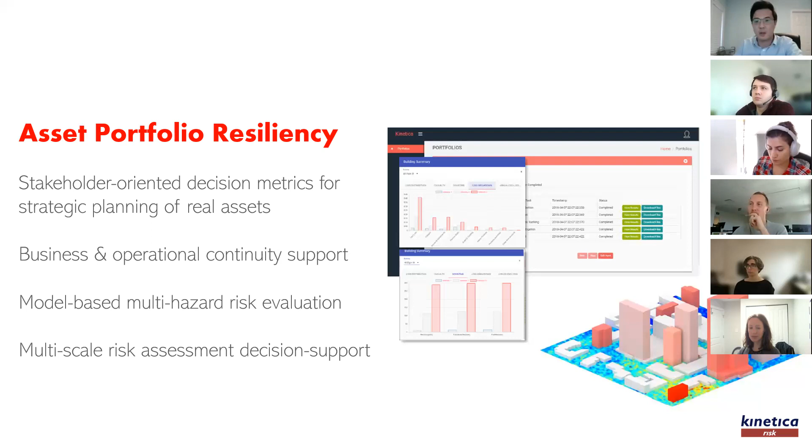So enough about that, I think it's time to bring it back to the topic. Why should we be discussing resiliency and sustainability together? That's not really a rhetorical question, but a genuine one, because a lot of my practice, honestly, my feeling is that both of these aspects are sort of in their own silo. They're well encapsulated in their own practice group. But I do encounter cases where a lot of the times you should be considering both of them.

And when I say sustainability, in the context of this presentation, 90% of the time I mean embodied carbon. I realize sustainability is a much bigger umbrella covering a lot more aspects than just carbon emissions, but perhaps it's somewhat intentional, in the sense that I wanted to convey there's probably more to it than just the embodied carbon. But the embodied carbon aspect is one big one, and that's our focus today.

So I wanted to start this discussion with a thought starter. If you contrast the qualities of sustainable construction versus resilient construction, what do you tend to think about? On one hand, for sustainable construction, we are typically interested in lower operational carbon, lower embodied carbon, lower energy, recycling buildings, reusing them, extending their life at the end of life.

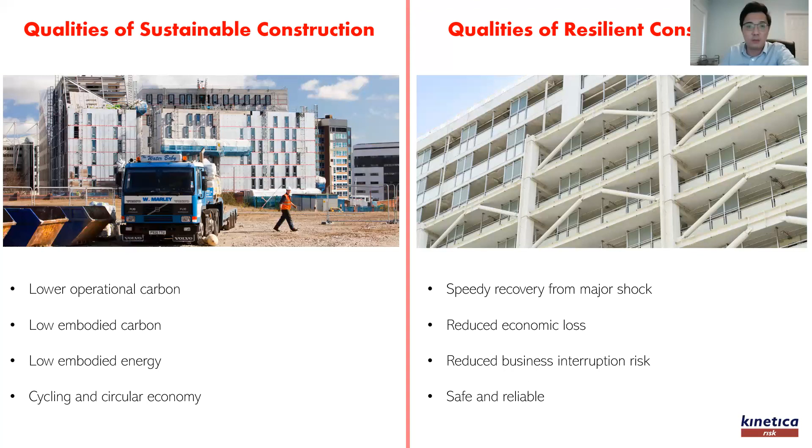If you look at these pointers and try to align them, you'll find that, maybe not in all cases, but in some cases, it's questionable whether they are consistent. For example, you can ask whether recycling buildings at the end of their useful life, albeit a very sensible thing to do from a sustainability perspective, is actually resilient. On the other hand, if using low embodied carbon materials such as timber in robust structures that resist very extreme environmental loads, is that feasible?

You could probably convince yourself that not in all cases these are conflicting or mutually exclusive things, but at least in some cases these are competing interests. So just keep that in mind.

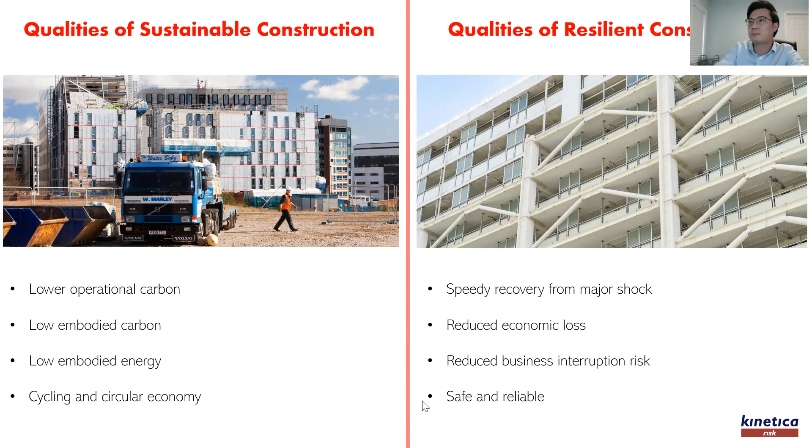Again, it's the same exercise, but coming more from a decision maker's perspective: what are the drivers that make people decide on sustainable construction practice versus resilient construction practice? On one hand, we hear a lot these days about ESG and corporate responsibility being one driving factor for going sustainable and going low carbon.

TCFD reporting and perhaps upcoming regulatory requirements will also tie into accessibility of capital for a lot of developers. There's also market forces; investors and buyers would like to have low carbon development. These are all forces driving people towards sustainable design.

On the other hand, for resilience, a lot of the time this is driven by protecting human well-being, health, and safety. I hate to say this, but a lot of the time this comes in the form of code compliance. For a lot of forward-looking business owners, it's about protecting critical assets, content, business continuity, and reputation.

There's also a market demand for disaster-resilient assets. I hate to say that this is probably less mature in Canada compared to some of the more disaster-prone regions in the world, such as Japan, Chile, Taiwan, and the Philippines. In those regions, you can actually see resiliency or disaster resiliency used as a marketing tool by developers, it's that developed in those economies.

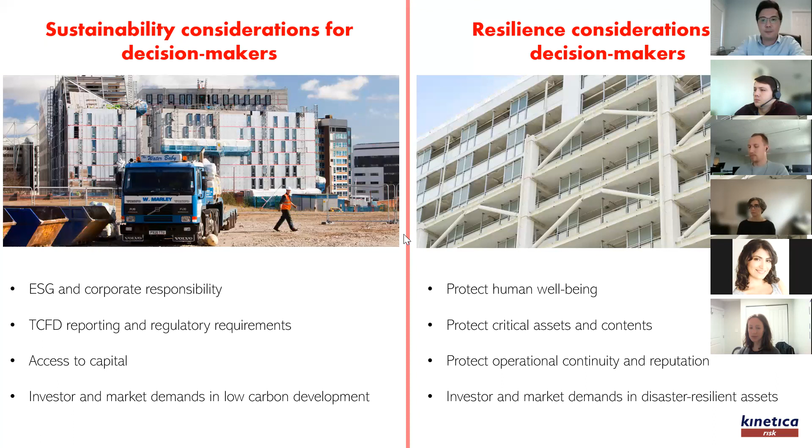The reason why I have these long contextual setting slides is that before I even get into embodied carbon, I want to highlight that there is a greater underlying theme: there should be a more holistic decision-making framework that incorporates both of these aspects when dealing with our built environment. A lot of times we'll find competing interests, meaning we'll have to balance trade-offs, and that's just the reality of things. If we don't do that, the alternative is that we may achieve neither.

Focusing back on the topic at hand, embodied carbon, I wanted to start with the phrase we hear very often: the greenest building is the one that's already built, or that already exists. Of course, you can ask, is that true? To be fair, I think in a lot of cases this is actually true, but I can contemplate some examples where this isn't true. As a society, we obviously want to reuse our buildings, but doing so blindly may leave some physical vulnerabilities unattended, leading not only to poorer building performance in terms of safety, but also defeating the purpose of reusing the building in the first place. We must be careful about that.

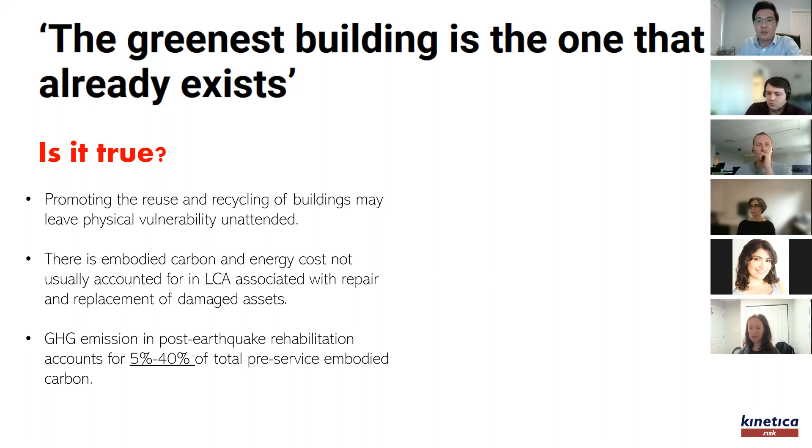But keep in mind that when a major event does occur and you get collapsed buildings, the embodied carbon to replace a building is pretty much 100% of the pre-service carbon, plus additional costs for demolition and debris removal and so on.

This is an example that's used often: the Christchurch earthquake in 2011, a little bit over a decade ago. This is a picture of the downtown area shown after the Christchurch earthquake. I think this is taken 5 years after the initial event, where most of the building was demolished. So 70% of the CBD has actually been demolished because of the earthquake, not because buildings collapsed, but because it was deemed impractical to actually repair them.

So demolition from the event led to basically 100% embodied carbon costs, if you think of it from the perspective of the building being replaced. There's a lot more I can talk about Christchurch, but the point here is that when an earthquake happens, it incurs a tremendous carbon cost to society. And it's so big that perhaps a substantial amount of our effort in trying to curb and reduce carbon emissions elsewhere will be undone. That's something to be thinking about.

Another example that always comes up in this topic is the tsunami and earthquake sequence in Tohoku, again in 2011, which was not a great year for disaster resilience. Most of you have probably seen online videos of the tsunami wiping out everything in its way as it makes shore. The fact is that the post-tsunami reconstruction of the residential sector alone in 2011 emitted about 26.3 million tons of CO2. To put that in perspective, that's about 2.1% of the total national emission in Japan.

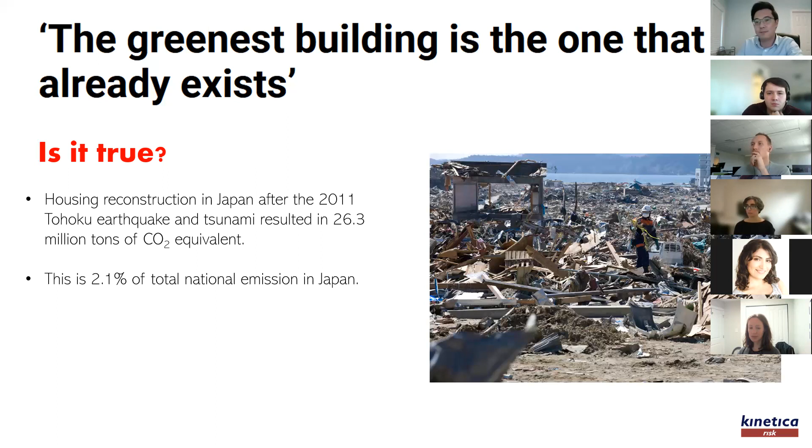So the previous couple of slides consider only earthquakes. In fact, talking climate change these days, extreme weather events such as hurricanes, floods, wildfire, which is something that's not unfamiliar in BC, can add further contributions to this carbon cost.

So flood and extreme events like this are relatively less severe. I mean, this one caused, I think, probably insured damage of $12 billion plus or minus, comparing to, you're probably looking at $200 billion US dollars for the Tohoku earthquake and tsunami.

But still, they are more frequent, like hurricanes happen every year. They're more frequent, and therefore the bill, as far as embodied carbon is concerned, may actually be even bigger coming from climate hazards because they may be getting more frequent as climate change makes its course.

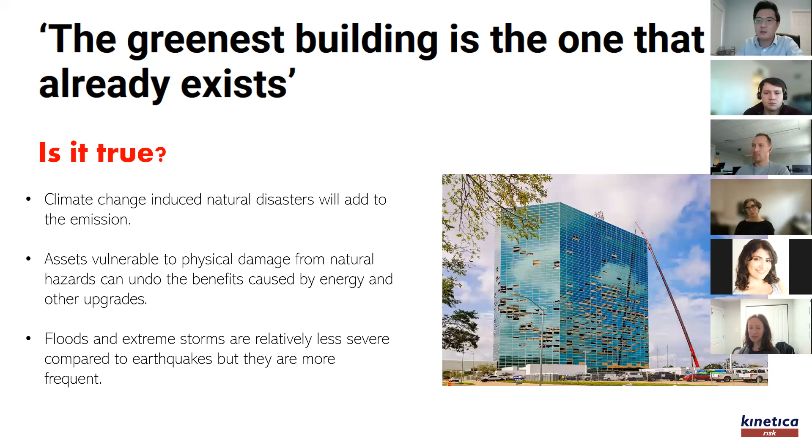An interesting point I want to make here is that the damage in the building envelope that you see in this picture could have also impacted the operational carbon because probably part of the insulation system of the building was affected. And if you think on the flip side, by considering both climate resiliency and emissions holistically, you could have addressed both problems.

So this brings me to the main points I want to discuss in this presentation, which is I think there's a need for us to quantify embodied carbon impacts coming from major natural disasters to inform decisions. On the one hand, I think decision makers should at the very least understand at a quantitative level what this embodied carbon contribution means to the emission strategies and targets.

And maybe at the very least, this may shift the baseline estimates of a lot of our existing assets. And secondly, maybe the silver lining in this is that I think there's genuine opportunity to embed both resiliency and sustainability thinking into a more holistic decision framework in order to make decisions about our built environment. The rest of the presentation, I try to touch on these two points.

And if at the end of the presentation, the takeaway is that there should be more exchange between those of us who work in resilience and those of us who work in sustainability, I think I would have achieved my purpose.

So the next part of the presentation, I probably focus on some of the tools that we use to quantify these kinds of impacts.

And for those of you who are engineers, well, first of all, as a professional working on basically resiliency and physical risk, our work intersects with embodied carbon mainly through the FEMA P58 standard. And I think for some of the engineers in the room, this is not unfamiliar, and others might not be so familiar. So I'll probably give a brief overview of the tools anyway.

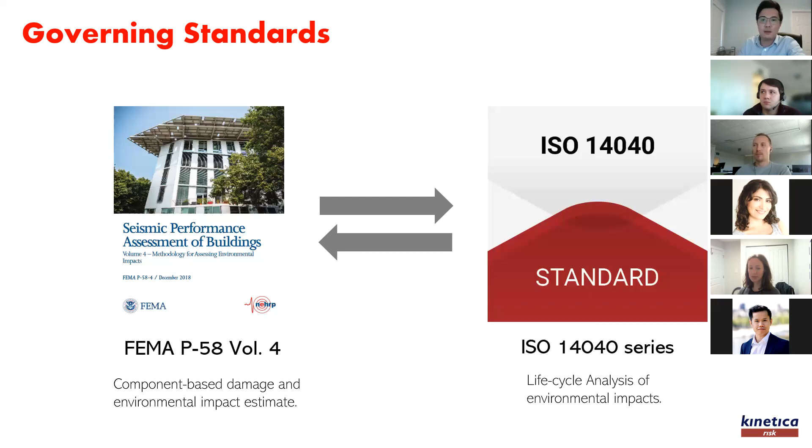And the main interactions that we deal with on the practical level, or in practice, really deal with region-specific or region-appropriate data, because the FEMA standard comes with a standard database that is based on US data. And in order to use it in other regions of the world, we need to find region-appropriate data, and that's one point I can further elaborate as I go on.

But yeah, the FEMA P58. So a lot of you might know, this is initially started as a probabilistic methodology for assessing earthquake damage and loss. The method functions at an asset-specific level, so on a single building. And it just so happens that the methodology developed to account for damage and loss in a single building is actually very similar to the way one would account for embodied energy and carbon costs.

So in the latest edition of the FEMA P58 that came out in 2018, there was a methodology included that would basically allow us to quantify these environmental impacts in a probabilistic way. So in the context of earthquake, I'm going to walk through what actually happens if somebody says, we estimated the embodied carbon following the FEMA P58 methodology.

So we will start with basically the seismic hazard at the site of interest. And the next step is that from the seismic hazard, we define the level of shaking and apply it to the building.

So we carry out engineering analysis on the building structure, and from those we derive on a component basis what kind of damage we might experience from the earthquake. This is essentially like doing accounting.

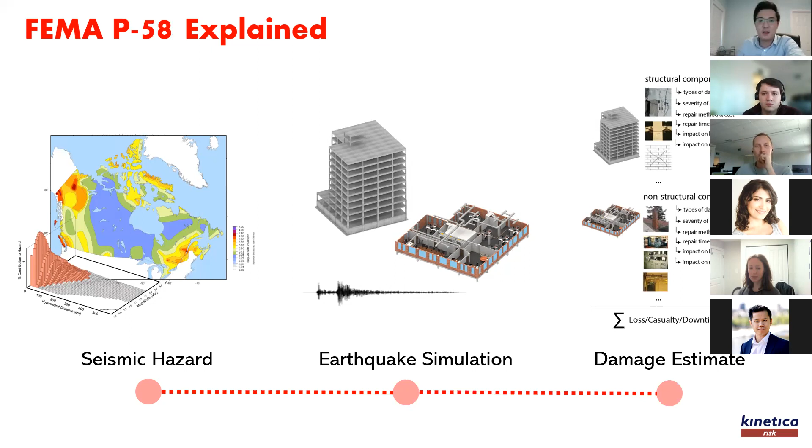We look at different types of components, count the quantities, and each component can be damaged to a certain extent. We repeat this process, and at the end of the day, we arrive at a description of the damage state of the building in terms of each individual component.

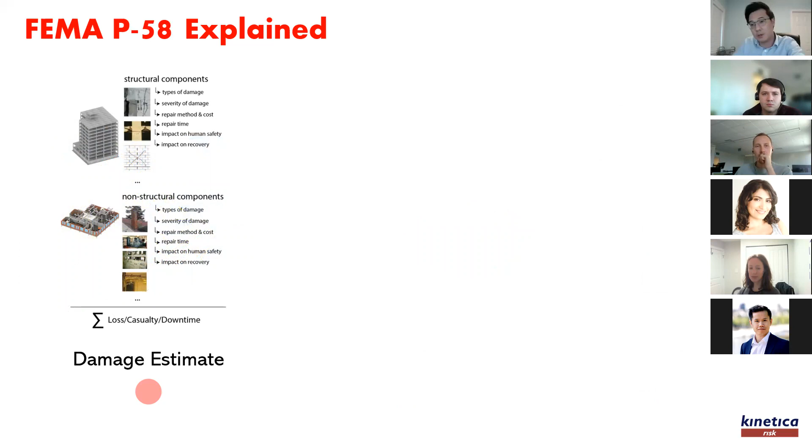And from those, we can derive damage-appropriate repair measures. The repair measures will change depending on the extent of damage.

These will include labor and material, transportation of materials onto site, people working on it, and energy consumption while you're doing it.

So each one of these repair activities would have a list of emission items, and by summing them up, you can characterize how much emission in terms of embodied carbon is incurred per repair activity.

If you sum up each repair activity for each component that's been damaged, and do it for all components, you can quantify the total emitted carbon from a damaged building, or to bring a damaged building back to its pre-earthquake state.

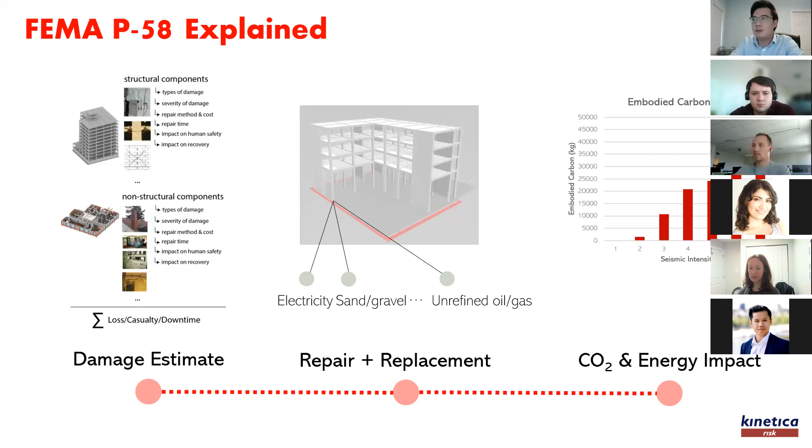And this is how we do it. I should mention that the default database coming with FEMA P58 is based on the USEEIO database.

I'm always not sure whether I should pronounce this UCO, but anyway, that's primarily US-based data, which is only appropriate for constructions in the US.

However, by no means is this a limitation on the methodology itself. You can always substitute this with more region-specific data that you think is more accurate if you want to.

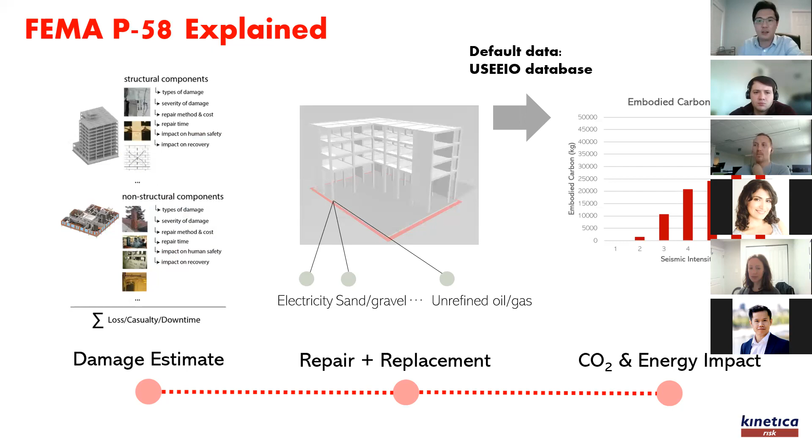So all of this process, starting from defining the seismic hazard, doing the earthquake simulation, all the way down to quantifying the embodied carbon and embodied energy impact in the building, we repeat these thousands of times.

This generates a probabilistic description of the embodied carbon in the post-disaster recovery, which becomes a final output or metric that you can incorporate into a fuller life cycle analysis.

And that will represent the post-disaster rehabilitation contribution of embodied carbon and energy that you would include in the life cycle.

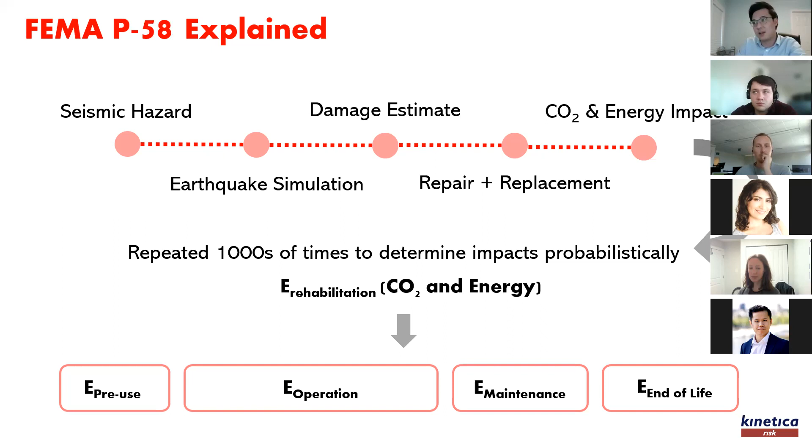So this is perhaps a little bit of a deviation from the main point, but I do want to mention that although the FEMA P58 method is initially developed for earthquakes, it doesn't actually have to be limited to only earthquake hazards.

In fact, it could be readily extendable to all these other kinds of climate-related hazards, including hurricanes, extreme storms, floods, and so on.

What you would do is basically replace the engineering analysis that you perform for earthquakes with an equivalent procedure for other types of hazards.

For example, in wind, you might look at aerodynamic analysis and windborne debris analysis. For floods, you might look at hydrometeorological models or hydrodynamic models.

At the end of the day, all you're trying to do is basically resolve the causal relationship between environmental loading and damage. And from that point on, everything unfolds exactly the same way as you would do in an earthquake analysis, to capture the embodied carbon or any kinds of resilience performance metrics.

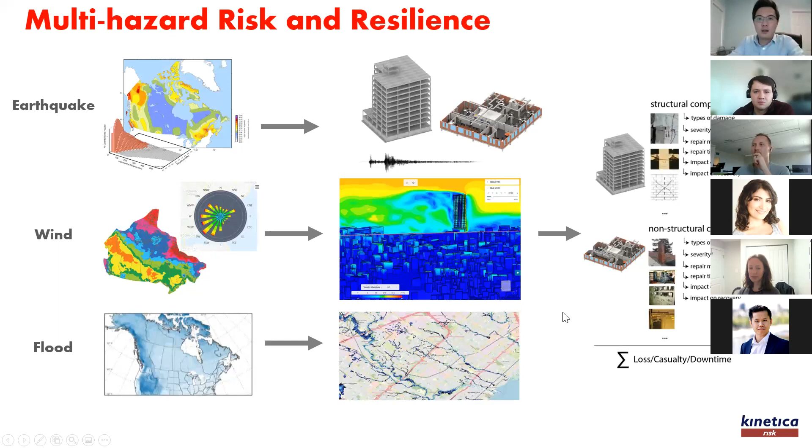So we can do this kind of analysis to capture the embodied carbon contributions from other types of hazards.

So in the next set of the presentation, I do want to present some examples of how FEMA P58 is actually put to action in practice. And the first example that I want to show is basically a project to develop design guidance for seismically resilient and sustainable tall residential buildings in BC.

And this is supported by BC Housing. And obviously the project scope is for seismicity in BC.

So we're looking only at the construction archetypes that occur commonly in the West Coast, and we're focusing really on just new buildings that will be designed to the modern seismic code.

So the resilience aspect of these buildings will manifest in the minimization of physical damage and downtime of these metrics, which we deal with on a regular basis. And obviously these will translate into lost homes for people who live in them, right? So that's a huge social issue as well.

On the other hand, the sustainability metrics we look at are the embodied carbon and embodied energy cost associated with earthquake recovery, quantified using the FEMA P58 method. In this project, we recalibrated the component database in the original methodology to reflect region-accurate costs in BC and Canada, including both repair cost consequences and carbon cost. This was one of the most time-consuming parts of the project.

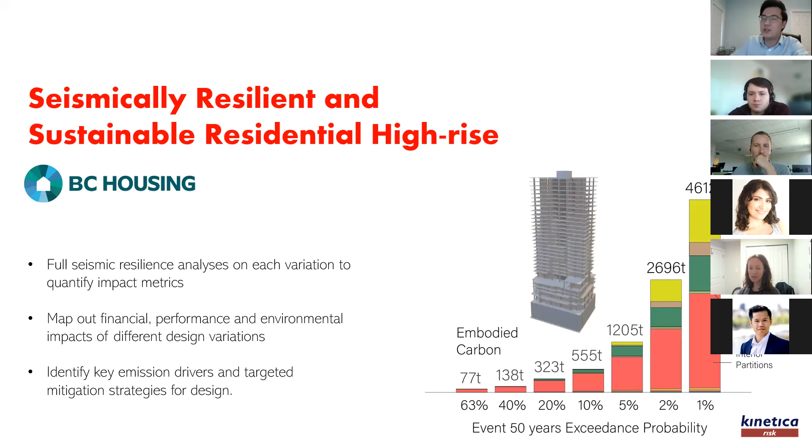Finally, if we try to design the most resilient structure possible by strategically upgrading the structural and non-structural components beyond what would otherwise be required by code, you can end up with a building that has almost no loss at all.

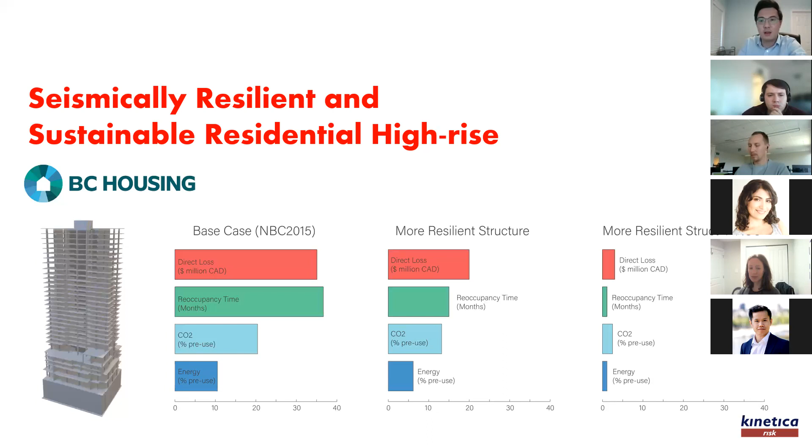The cost of doing these additional steps typically ranges from 1 to a few percent in the context of a new building. We're hoping we can produce this kind of analysis to give quick guidance for decision makers to start exploring these beyond-code solutions, as I think they'll probably be required as we move forward with climate change and disaster resiliency. So one purpose of this report is to produce quick guidelines for BC Housing, but it's also for general developers, focusing mainly on residential buildings.

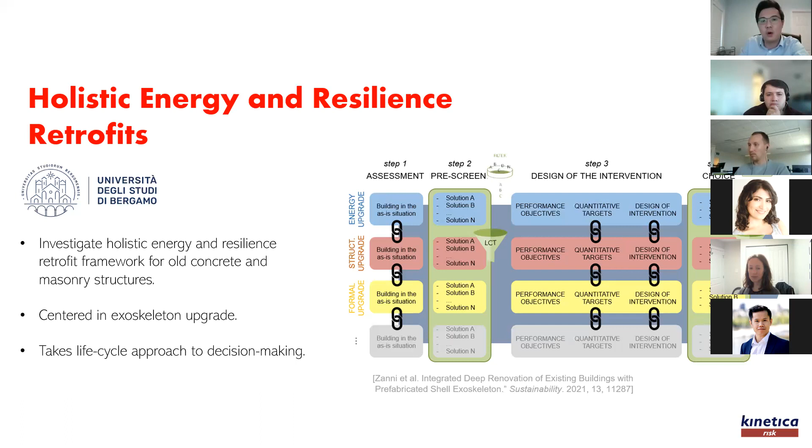Another project I want to touch on is work we've done in collaboration with the University of Bergamo in Italy. A central theme is the life cycle thinking approach for combined energy and seismic upgrade of deficient building stocks. This framework aligns well with the holistic approach to the built environment I discussed earlier, considering both resiliency and sustainability. The project considered an array of environmental metrics, not just embodied carbon. The emphasis is probably more on energy retrofit that will reduce operational carbon in this particular case.

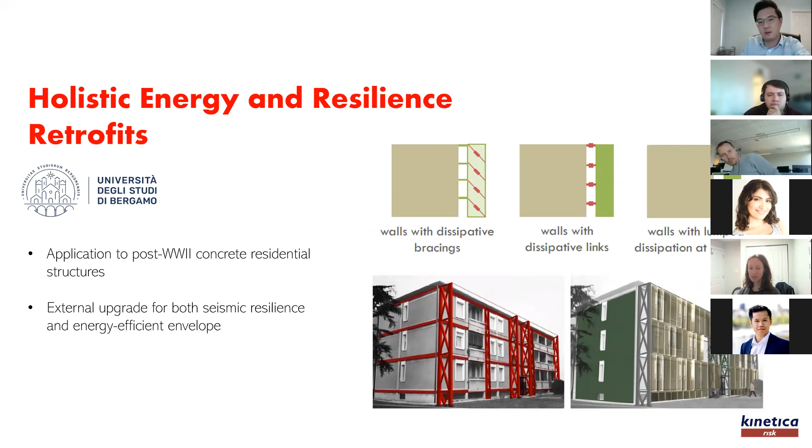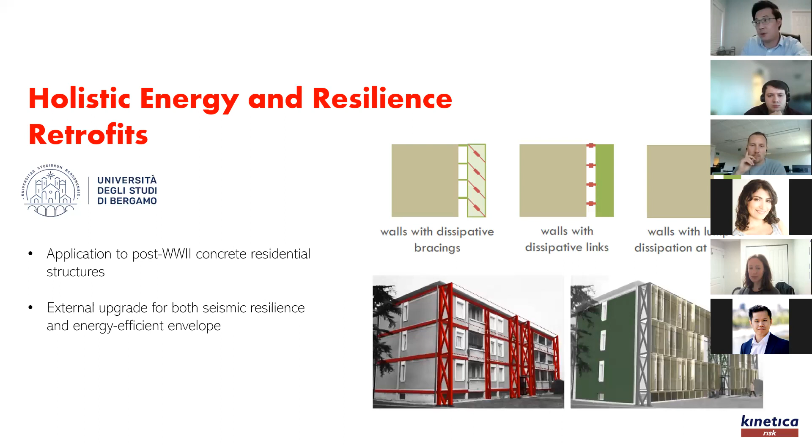One application we looked at for this holistic design framework is the exterior envelope upgrade of quintessential post-World War II structures, erected in massive quantities after the war to accommodate the booming population. For a long time, the Italians have known about deficiencies in these buildings in terms of energy consumption and structural integrity. Our approach was to generate an exhaustive list of structural upgrade solutions that work in unison with the external energy upgrade. This picture shows some concepts for structural and architectural upgrades proposed for these types of structures.

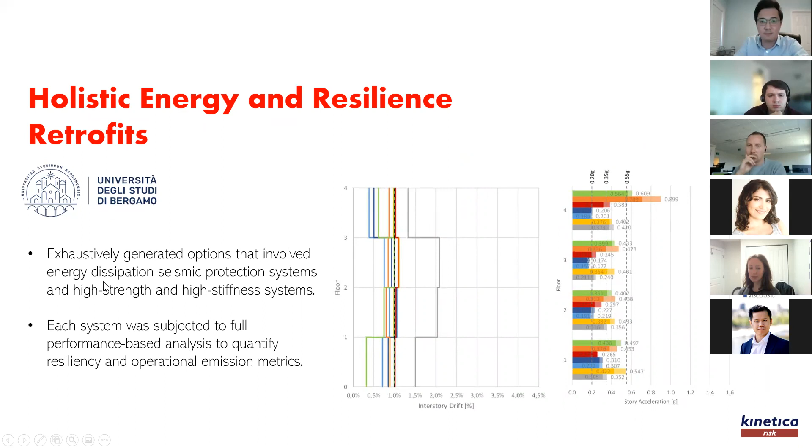I would say the embodied carbon metric, although important, is not a deal breaker in this sense, because a lot of the decisions that drive these upgrades are actually governed by the need for energy upgrade and seismic upgrade. Nonetheless, it's an important factor to be considered. This example demonstrates that it drops out quite conveniently from the analysis we do, and there's no reason why it shouldn't be used as part of the decision making.

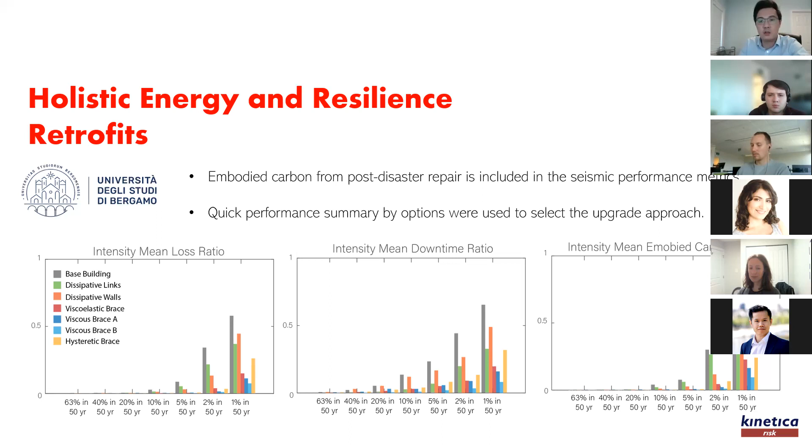A final example I want to touch on, using FEMA P58, is a joint research project between Kinetica Risk and the University of Toronto on a resilient mass timber building. I don't think I have to preach to this group about the benefits of timber construction—actually, the opposite often happens, where I'm the one preached to about timber's benefits. However, I mentioned earlier that timber constructions have their own issues with seismic resiliency because of their lightweight and lower stiffness compared to concrete and steel.

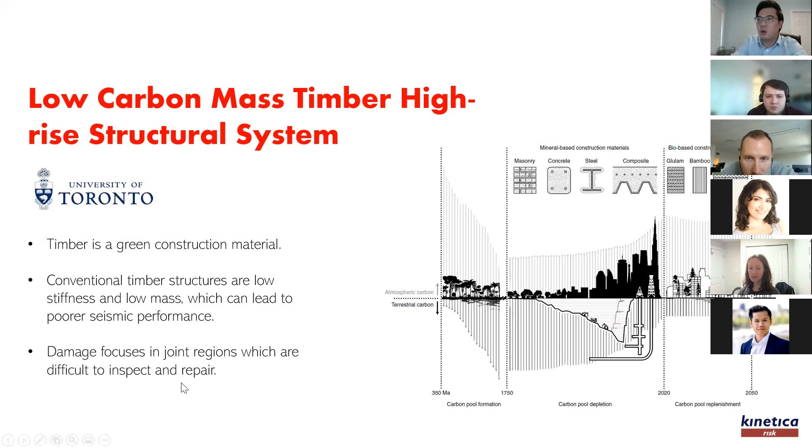Furthermore, one problem with timber constructions in seismic areas is that most of the nonlinear behavior—the damage—occurs in the joints. These are not necessarily always easy to inspect, assess, and repair. So one goal of this project is to propose an alternative mass timber shear wall structural system with improved seismic performance through supplemental damping elements embedded in timber shear walls.

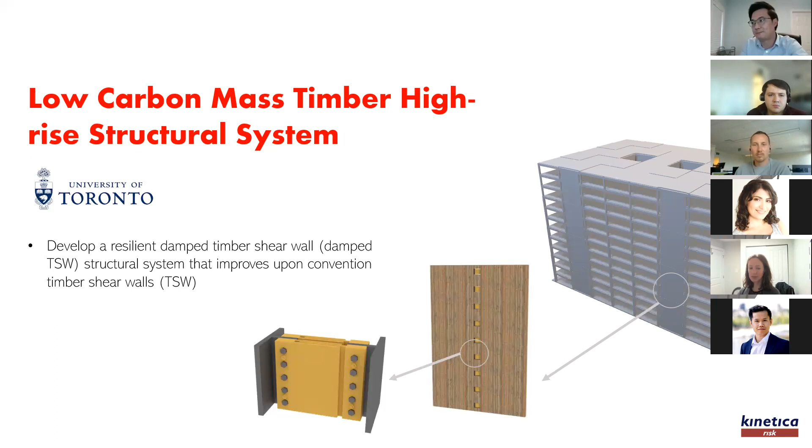This is a schematic of one prototype building we came up with: 12 stories, with timber shear walls embedding damage-free dampers. The idea is that in an earthquake, these dampers will dissipate the energy, thereby lowering the seismic demand on the rest of the structure and protecting the connection elements that would otherwise be easily damaged, eliminating repair that would otherwise be required.

Through analysis, we're able to demonstrate that this particular scheme would reduce seismic demands by about 30 to 40%. And that translates directly into a reduction of loss and a reduction of embodied carbon. This is very easily done through exactly the same FEMA P58 procedure. In this particular case, because the prototype building's components are well known in terms of structural details, we were able to derive very easy to use and fairly accurate predictions of embodied carbon impacts just based on running these analyses. So you can use them without necessarily running the full performance-based analysis to quantify, at least at a high level, what the embodied carbon impact would be.

Now, again, I want to say that from an emissions perspective, I think the embodied carbon savings in this example is likely to be less important than the fact that this is a mass timber construction. But nonetheless, it's a well quantified metric that can be readily incorporated into the decision making, and there's no reason why we shouldn't do it.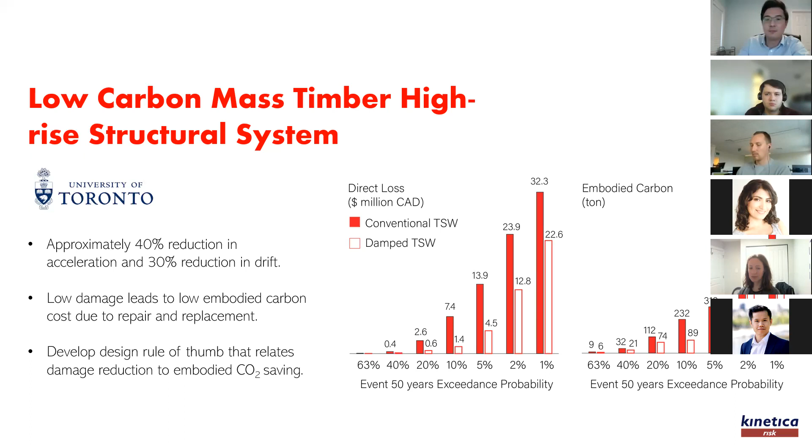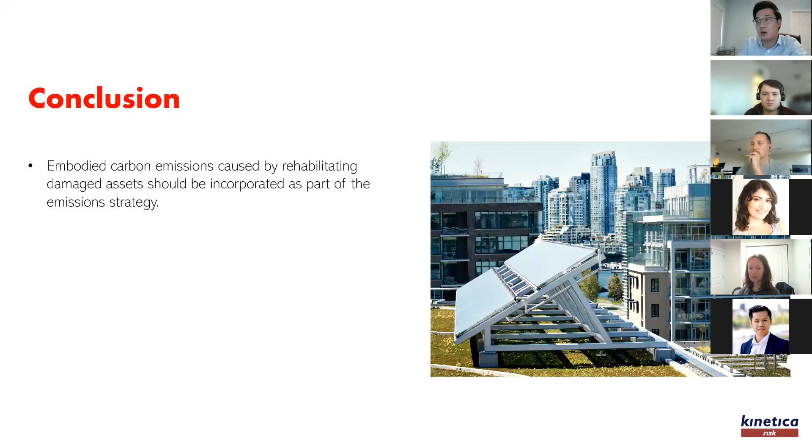So I wanted to conclude at this point in my presentation with a few takeaways. Firstly, I think it's clear that embodied carbon emissions caused by post-disaster rehabilitation of damaged assets is a significant part of the life cycle carbon cost, and at the very least, it's worth quantifying and considering in our emissions strategy. Number two, we have existing engineering tools, namely the FEMA P58 procedure, that allow us to quantify this, not just for earthquake, but for other types of environmental loading as well.

And finally, this is probably the most important point I want to drive home: there is a need for more professional collaboration between those of us who work on resiliency and those who work on sustainability, to develop more holistic approaches to decision-making in our built environment. This could include things like better databases that facilitate the type of calculations I presented in the Canadian context, to allow more people to incorporate it into decision-making. Or it could be in the form of regular project planning meetings or stakeholder meetings, to make sure we bring to the surface all these different aspects of building performance so it's upfront and clear at the beginning of the planning cycle.